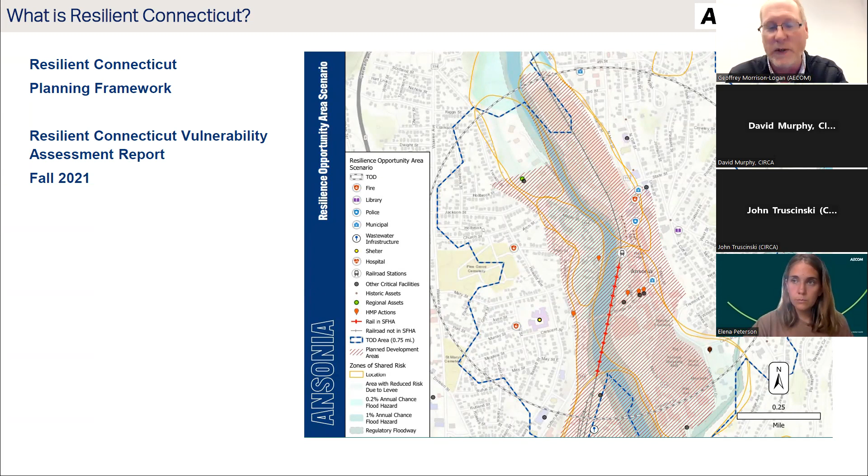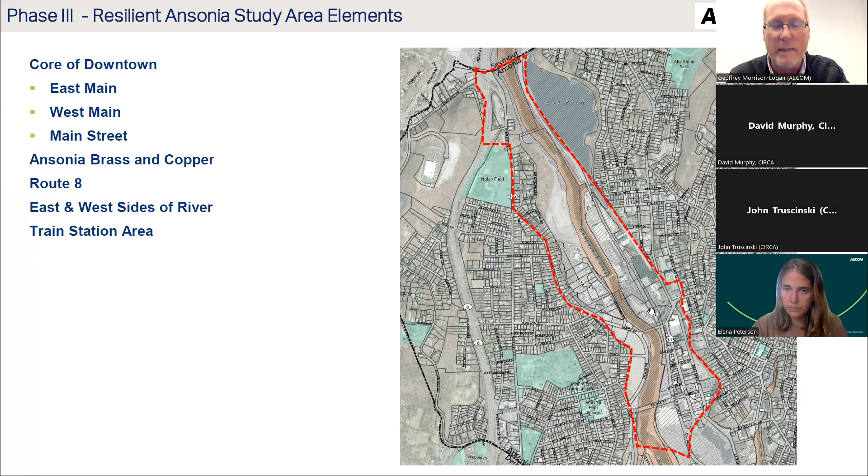And you can see the river that runs through here. Route 8 is up towards the north and runs parallel to the river. And then right in the heart of downtown, as many of you know, there's the train station that provides access to the region and also a critical mobility opportunity in the downtown to get the city connected as well.

So Ellie, you want to talk a little bit about this one? Because in addition to the study area, we started to hone in on why we're focusing on these areas based on the assets that are there today.

Yeah, we felt it would be helpful to have an aerial view of the downtown to see how the river really defines our project area. On the right side, you can see the majority of the downtown. That's where the main train station is, as well as City Hall and the police station. We just mentioned the copper and brass facility that's up sort of at the top of the image. And then on the other side of the river...

It's sort of defined by Olson Drive, and there are some fields along Olson Drive that are flagged for development. And then in the far part of the image, you can see the Route 8 connector, which is the main access to the town. Part of our initiative has been finding ways we might be able to enhance greater connectivity and transit mobility there.

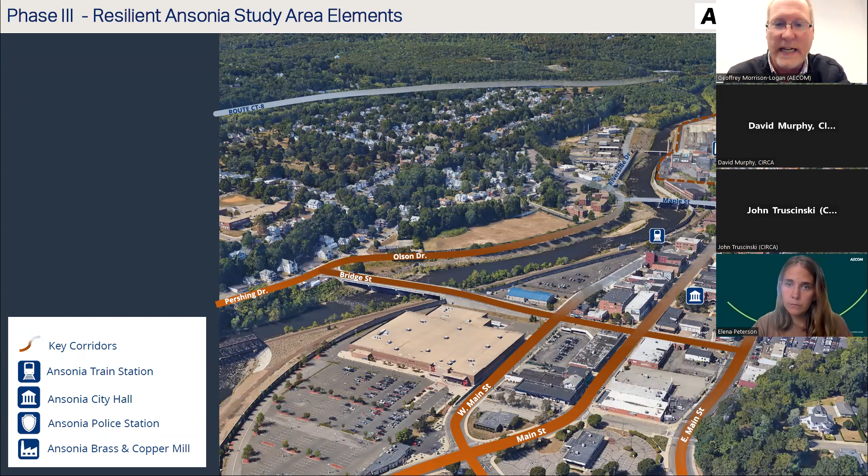Another great aspect of this drawing is it shows the flood wall system that's in there today. As we've gone through this project, we've realized how critical a piece of infrastructure that is, currently protecting the downtown from flooding. You're going to hear us talk a bit tonight about why, in the future, embracing that, further securing it, and making it part of the downtown's future is going to be very important as well. So let's go to the next slide, Ellie.

So a little bit about the character. I mentioned the flood walls, obviously very prominent along the river on both banks, and it shows here clearly that it protects through some of the gates that are out there today, along with some of the existing development, and how important it is about securing the development pieces and preventing the flooding that would happen on these sites if those systems weren't there. And knowing that Main Street is so close by, and what that means for the heart of the community. You grew up around the riverfront. We want to embrace the riverfront and really secure, through these initiatives, many of the same things. Next slide.

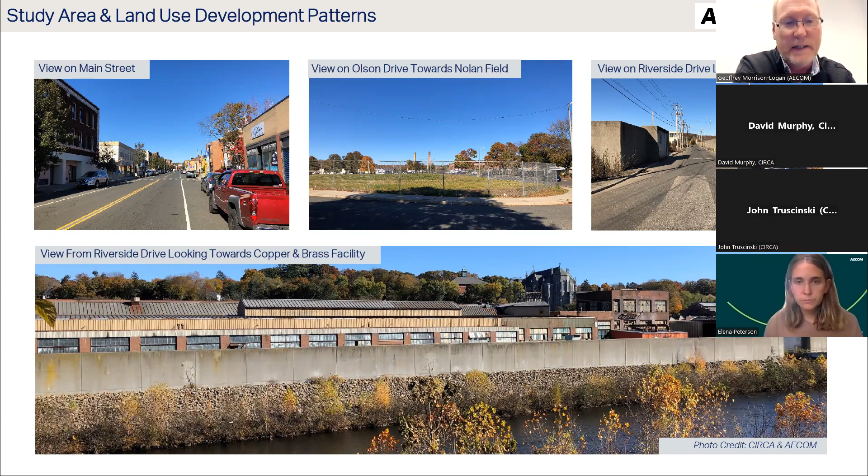And Ellie, do you want to talk a little bit about where we were last time in our last public meeting about why thinking about heat and vulnerabilities would be important to downtown as well?

Yeah, for those of you that weren't part of the last meeting, we spent a decent amount of time talking about heat vulnerability in Ansonia in particular. Although Ansonia is located more inland, it also shares some similar heat risks that a lot of coastal communities in Connecticut are facing.

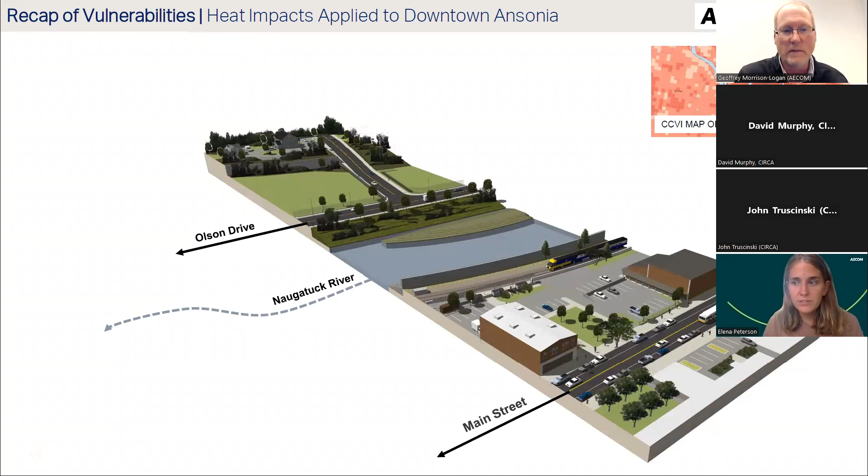For the future with climate change, we thought it would be helpful to take a transect of the downtown in Ansonia. This is located about where the train station is. You can see there's Main Street, the river, which is dividing the transect, and then Olson Drive in the background.

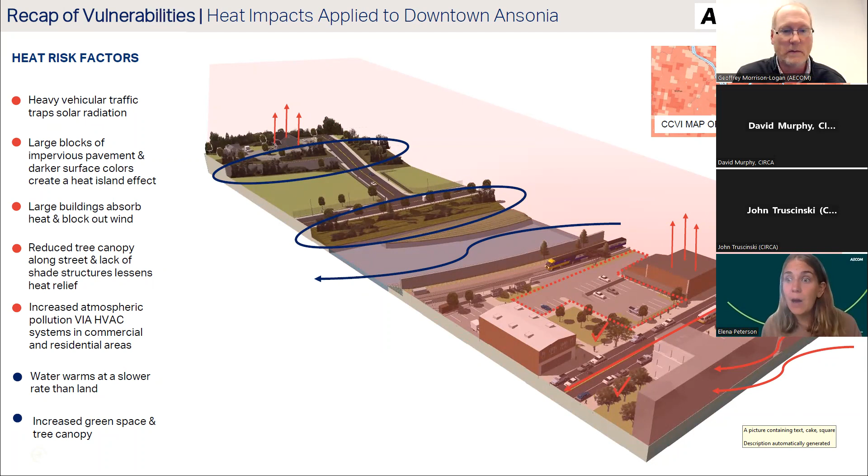And just start to identify some of the factors that makes this area more vulnerable to heat currently and into the future. Some of those factors being large buildings that absorb heat and block out wind, large blocks of impervious pavement. Ansonia has a long history of being a very industrial town, and many areas are still blocked out with impervious surfaces, and there's less tree canopy overall as well to block out heat. So these are some of the factors that we look at to help make areas more resilient in the long term.

Great. Let's talk a little bit about some of the design strategies here as well that we've been reflecting on. Ellie, you want to go to the next slide?

So when we think about what is a resilient community, and David and John, feel free to join in on the conversation here, it's been great for this project as well as others to be, I'd call it a little bit more holistic in terms of what this means for resiliency issues that are kind of cross-cutting as well.

So the idea about focusing on the benefits of community development, understanding within the community if there's ways that you can get to the downtown, to your water body, to the riverfront, and think about evacuation and the kind of resilient corridors as you navigate the downtown to make sure you're securing primary ways in and out.

Thinking about the ecosystems when we think about flood and rain events and stormwater and all those things, by kind of protecting a lot of those existing natural ecosystems, those things perform in a way that help the overall system work in terms of kind of recovering from some of those events.

And then thinking about energy and thinking about economic and social resilience. So as a community, how you are powered, how your economics, how your social infrastructure really starts to work, where you get relief as a community from some of these events.

And we'll talk a lot about tonight, this idea of a resilient center for the community. And then, as Ellie mentioned, really the importance of heat and understanding how heat and flooding go together, and really the ability to think about heat island effect and how you were kind of really mitigating some of those things at a very localized level as well.

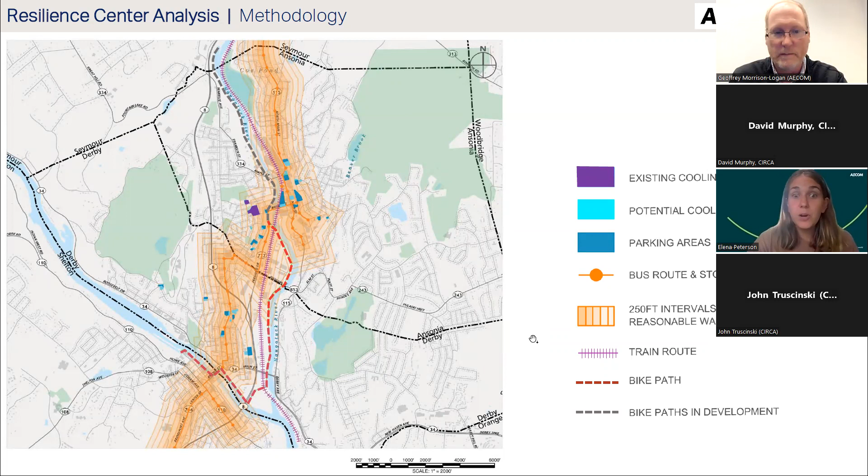And then we looked at large public and some private buildings that the community is already fairly familiar with that maybe could be good applicants for a resilience center in the future, or a pop-up resilience center in the case of an emergency need for one. Based off of this scoring system, there were several buildings that scored most highly, and among those was the Ansonia Armory, which we've now expanded into looking at in more detail, trying to determine what would be needed to convert it into a resilience center.

For those of you that aren't familiar, the Ansonia Armory is located a little bit north of downtown, right next to the Ansonia Brass and Copper Mill facility, just past the police station. It's really nicely located right along the main bus line, as well as close to all the critical facilities downtown.

It's also been utilized by the community for a lot of public events. It's been used as a voting station. During COVID, it was used as a coronavirus testing location. And just last year, it ran the Community Health Improvement Plan workshop, which looked at how the town could encourage more public exercise, especially in the winter months. Due to the familiarity of this place amongst the community, we felt it was a pretty great test subject for thinking about how a resilience center could work.

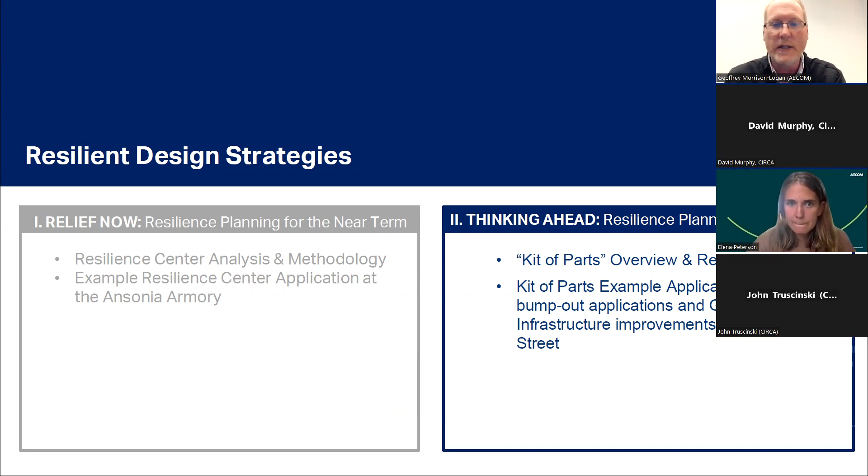Sure, yes. Let's go on to the next slide here. We can dive right into this idea that we've looked, as I mentioned before, at very strategic locations throughout the downtown that we can amplify with some key recommendations.

So of those, we intentionally looked along the riverfront over by Olson, down Main Street as a case study by the train station, East Main Street where City Hall is, next to where the parking lots are, and then off of Riverside Drive, to be able to test in a way some strategies that we can put in.

So we'll go through this relatively quickly here, but we'd like to show you a little bit about some of the key findings in each of those areas.

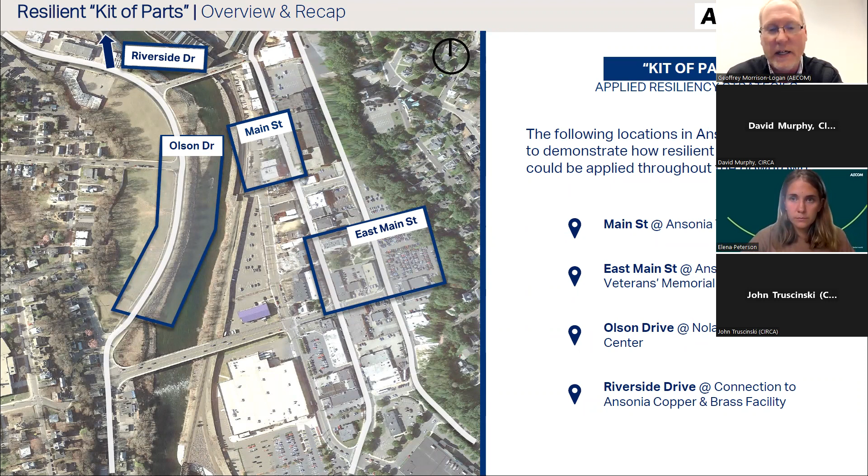If you go on to the next slide, what we'll do is talk about this kind of kit of parts applying to these locations. They're color coded to the left, talking about achieving very different goals - thinking about natural systems or the landscape, how it's performing from a roadway perspective, wayfinding and signage, solar, and those types of things. We're talking about potentially retrofitting some of these locations to make them more resilient, more accessible, and having those features that are frankly missing today.

So maybe, Ellie, let me hand it back to you to talk about some of the specifics of these locations.

Yeah, so here we're looking at being able to encourage a greater green buffer on the roadway. This is showing Main Street, the hub of downtown, and being able to encourage more walkability here would be a huge asset. A planted bump out is one way that we thought about doing that. Bump outs create the opportunity for safer streets, as well as having aesthetic and visual relief.

And then we also thought about the opportunity of creating more solar infrastructure. Ansonia Recharged has been looking at incorporating more green energy into the downtown, so we thought Main Street might be one place where we could seek to achieve that.

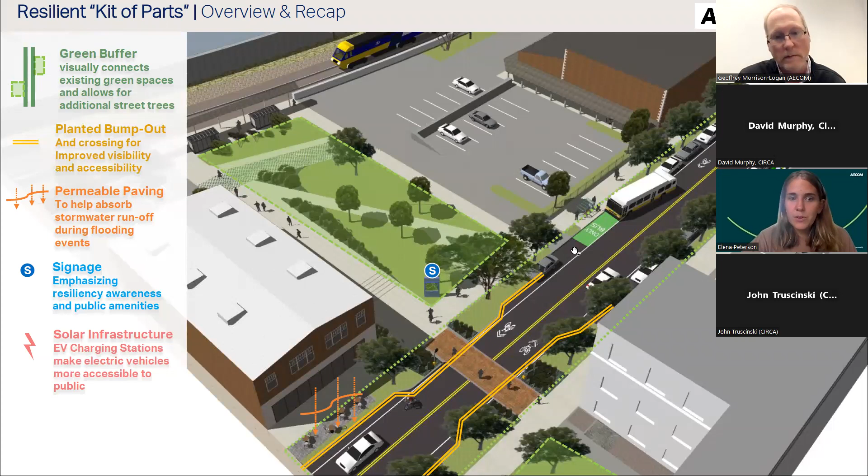Additionally, more signage, thinking about how we can reuse some of our materials through a resiliency lens - using maybe more permeable paving or lighter colored paving that can reflect heat. These are just a few of the examples that we looked at on Main Street in particular.

And maybe I'll jump in on this one, Ellie - we're over by East Main Street here too. Again, a similar kit of parts where we can see City Hall off in the background. The idea is taking the park next door to City Hall and thinking about it as a much improved piece of green infrastructure through landscaping and stormwater strategies, and taking over East Main Street, really necking that down, adding in some trees for shading and cooling effect along the street. And then, as the mayor mentioned, the idea of some energy here in downtown - taking the existing parking lots that are there, putting in photovoltaic cells, thinking about charging stations.

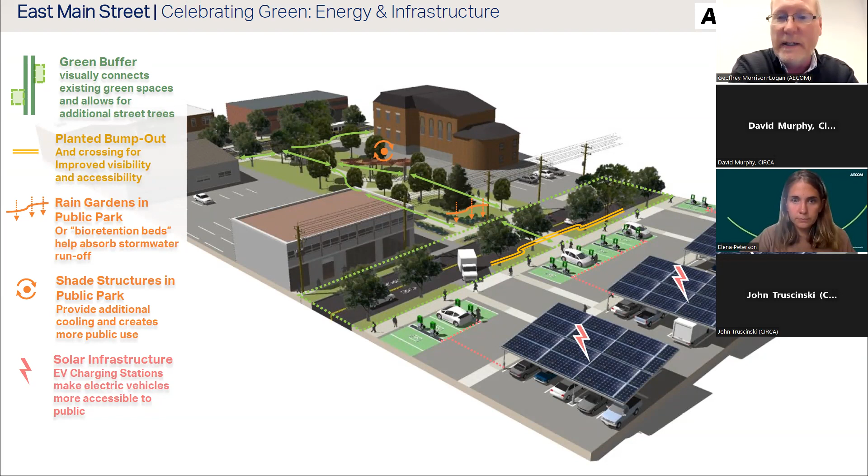Let's go on to the next one, Ellie, this is a little bit more of a recap here. We've jumped over by Olson Drive, by those locations on the west side of the river, where those existing fields are. The idea there is about getting the community connected through a new trail system that would link north-south along the riverfront.

The idea of taking what's an existing really wide road there and necking that down, having some bump outs at the corners, putting in some green infrastructure for stormwater control, thinking about pervious pavement for parking on that street versus just regular pavement. And then the idea of understanding what's happening on the river - some great overlooks, some resting areas to get shade and overlooks and cooling by the riverfront. This is a very special part of your downtown that really could be amplified to make it an amenity as well as perform from a resiliency perspective.

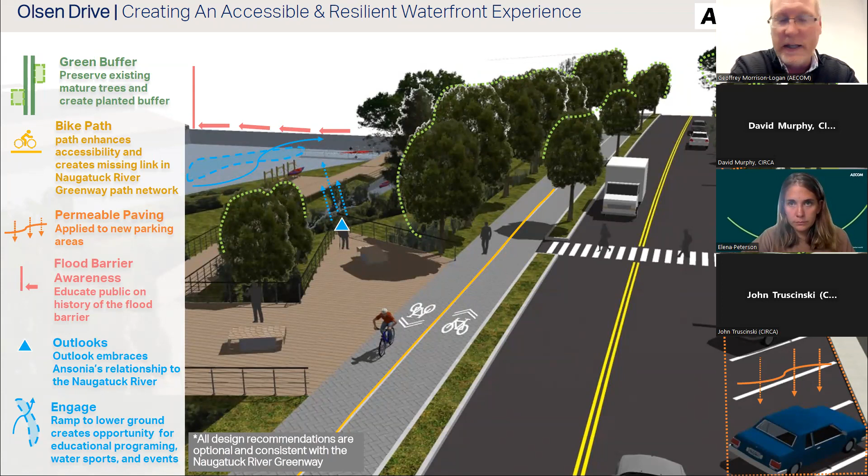And let's go on to the next location, again showing these kind of applied kit of parts. Now we move north up along Riverside Drive. And again, the idea is next to the existing flood protection system that's there today - there's really no reason why that cannot be further embraced and enhanced for the long term, thinking about biking accessibility and stormwater improvements along that to help with localized flooding versus flooding from the river.

And then the idea of some signage and wayfinding, and the importance of thinking about these as a system that not only performs from the water, but also unlocks the ability to have some development, especially around the copper mill site across the river. If these new investments could lead towards better bridges, better connections, better flood wall systems and protection, that can start to unlock some of the economic development that's really a great potential for the downtown as well.

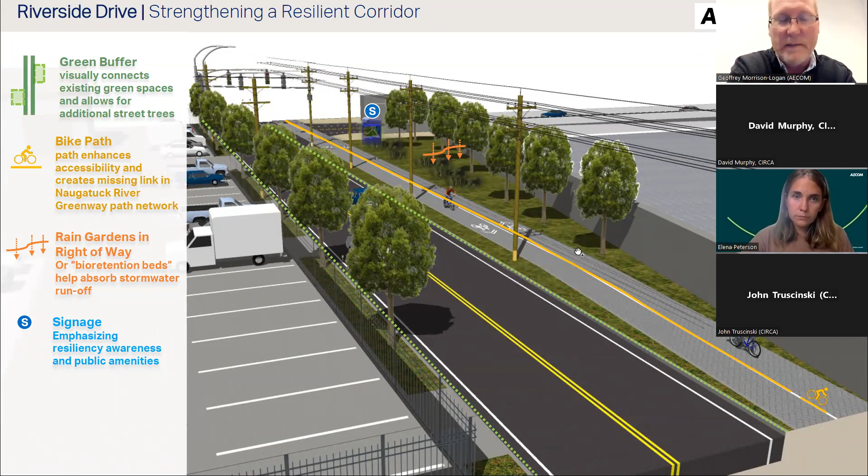Let's go on to the next slide. As a recap, where we ended last time on this broader kit of parts, we really believe that if you look at the entire downtown and all those locations we looked at, you can start to think about how these resiliency kit of parts or strategies can be deployed through these different locations.

So that over time your downtown is very robust. It has a lot of green links to get connected with this green infrastructure that'll let it perform. It has better ways of getting bikes and pedestrians around, and it's thinking about how you engage the river, how you have overlooks, and how that river can really be performing versus just being behind walls. Also, as the red line shows, knowing how important that piece of infrastructure is from the flood wall protection system, further certifying it and looking at maintenance issues, we know that's a really critical part of the future as well.

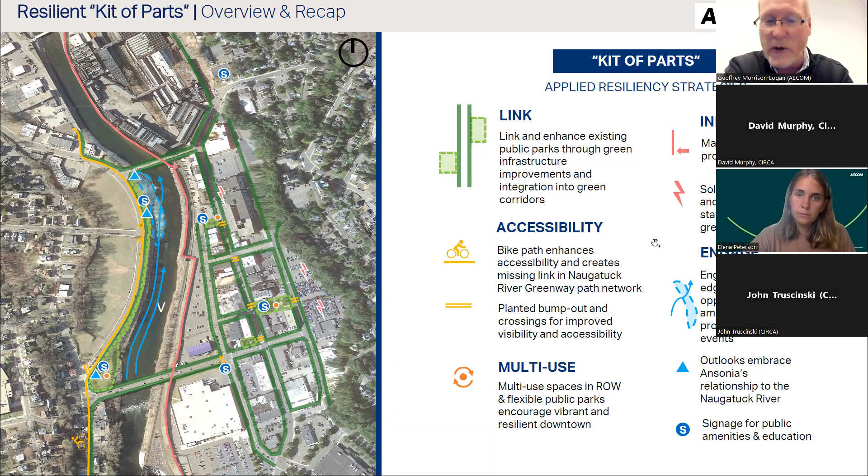So with that, if we go to the next slide, we'll start to dive in a bit further in terms of some of the accessibility parts of it. Do you want to mention this one here, Ellie?

Yeah sure. So we thought it would be useful to take one small kernel of an idea that we proposed in the first section, such as the planted bump out, and break that down into how all the different ways that such a simple intervention could have a different impact in terms of resiliency.

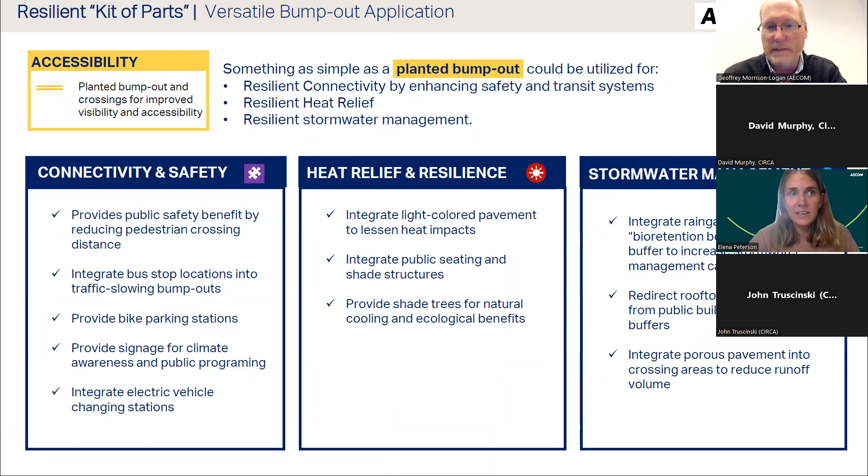So we took just a sample transect of Main Street. Here you can see there's a pretty wide corridor with parking on either side. There's currently bus stops along that roadway, and then also sidewalk space.

And we looked at it in terms of putting in a planted bump out to serve the purposes of enhancing connectivity. So although a bump out can provide some aesthetic value and visual relief, it also helps serve the purpose of safer streets by closing the distance of crossings. And so it can create a more walkable environment and a more transit-friendly environment as well.

You could incorporate bike parking into the space allotted for the bump outs. You could also use part of the bump out for a nicer bus stop landing that's easier to navigate to. You could use some of the bump out space for generating more signage about climate awareness or other public programming, or integrate electric vehicle charging stations into some of these areas. There's lots of different ways it could be utilized to really improve the pedestrian experience of people downtown.

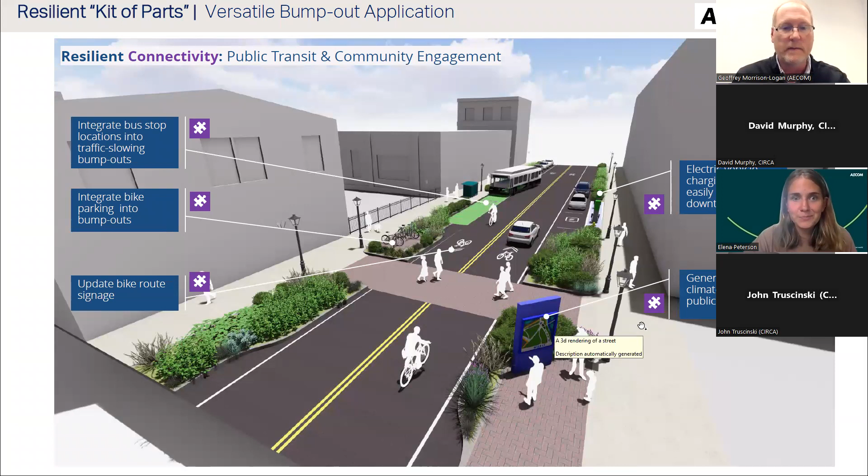Likewise, you could look at a planted bump out as far as how it could serve for heat relief. You could use some of the space for integrating more public seating and shade structures. You could promote more shade canopy of trees along the corridor, or even integrate lighter colored pavement, which, as we talked about earlier, can help reflect heat and create a cooler land surface.

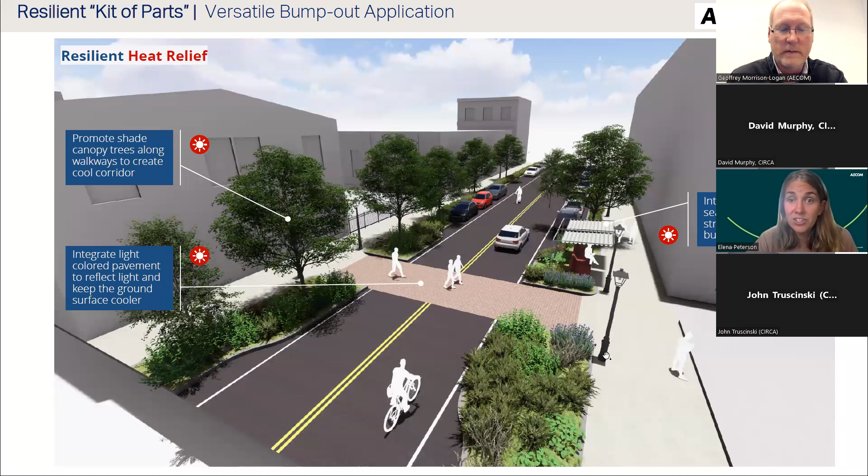Next, you could look at it purely in terms of stormwater management. You can integrate rainwater gardens or bioretention beds into the bump out space along the corridor. You could also incorporate porous pavement into new materials you introduce, which allows water to be redirected into the beds on either side of the street. You could even look at integrating a rooftop water catchment system, which could take that water and utilize it in the planted regions.

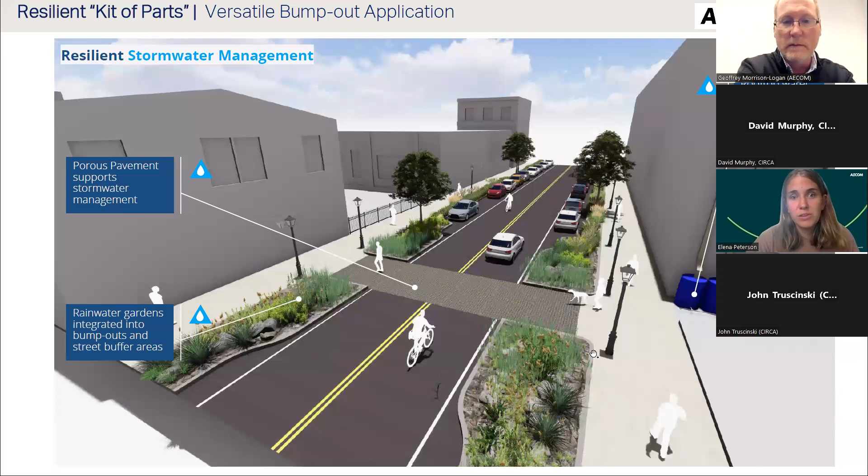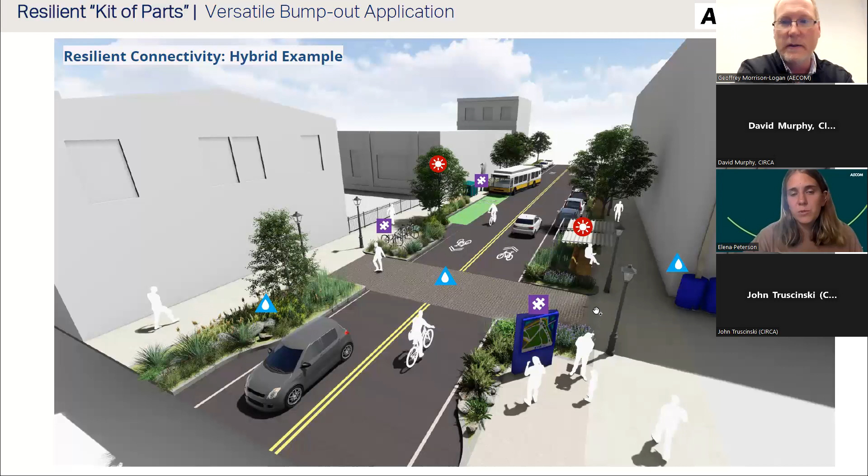And then lastly, we thought it would be exciting to think about a hybrid example where this simple intervention can operate on many different planes of resiliency thinking. Here we have the bike parking idea incorporated into part of the bump out, shade structures on the opposite side of the street, porous pavement used in the crossings, and shade canopy dispersed throughout. So it helps generate some ideas of how one simple intervention can actually have a large impact.

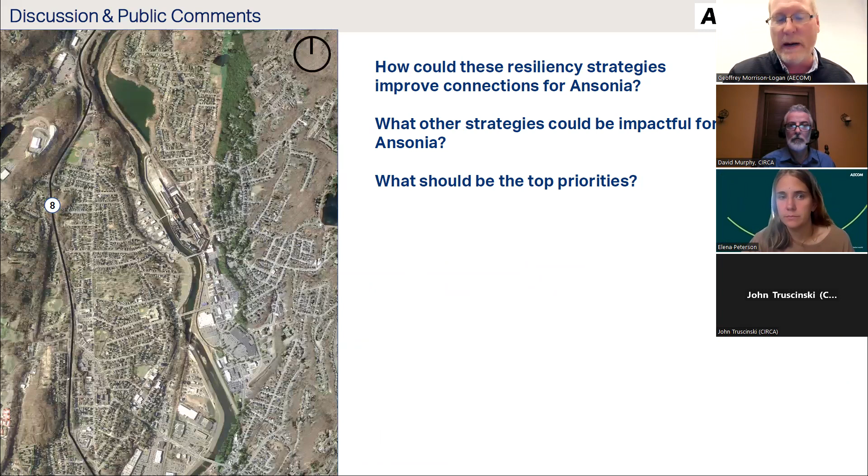Maybe we go to the next couple of slides as a reminder. We spent our last public meeting talking about all the kit of parts, zooming into those areas, with a bit of a refresher tonight. But with some comments, especially after tonight's meeting, we'd love to hear more about that resiliency center idea and how more investment into that project could bear fruit for the entire community in terms of cooling, access, major events, and having a secure place for downtown.

And as Elena just walked us through, we'd love to get a few more ideas around Main Street and how deploying any of those options through bump outs and enhancements that what's already a great Main Street can become even better by having these resiliency, Green Street, mobile, accessible aspects that can help it perform in terms of your resiliency goals as well. So that's what we'd like to spend a little time on.

I know maybe what I'd like to do is open it up to David and John, because I know you're working with many communities throughout Connecticut, to get a quick soundbite about why these projects might make sense, and if the city can rally around identifying some of their top priorities, why this is helpful to start moving these from big ideas into things that might become fundable over time. So help us a little with the context, David.

Sure, I can say a couple words. And Nancy, it looks like you're the person here who I don't know, so if you're involved with city government and want to shout that out, let me know before I say too much. But in general, we were interested in looking for ways to plug into all the good work already happening in Ansonia. There's so much happening downtown, and the city's been so successful gaining grants, with the redevelopment and units coming online and the future of Ansonia Brass and Copper, we thought it would be remiss not to try to offer some ideas to become more resilient.

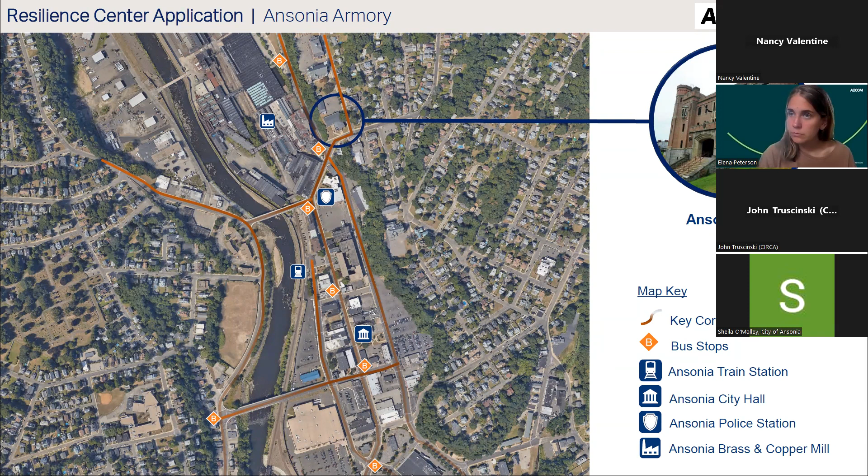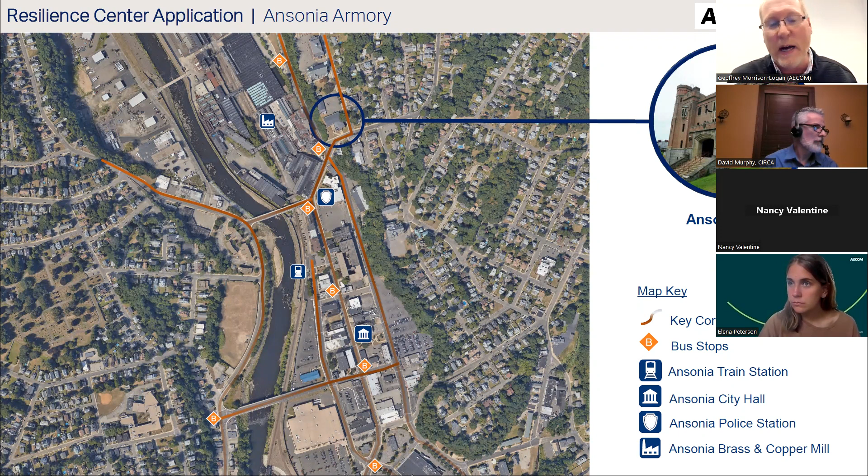We've been working on this for about 9 to 12 months, thinking about why we'd have certain improvements, what the benefits would be, and how to be holistic about the entire downtown as a living, breathing system of interrelated things. Given that the flood wall protection system is there today, and understanding how critical that is, how can we plan with and around that to identify real projects that could move forward, going beyond studying and master planning into projects the city can move forward with — whether on the city's own dollars, grants they can go after, or even partnering with the state to implement these things over time.

Of all the different things we looked at, there's a lot of opportunity within Ansonia to make real inroads from a resiliency perspective. The top two that rose to the top were the idea of making the Ansonia Armory a hub, as John talked about, and investing more in it to make it a benefit for the entire community.

Also the idea of taking some of your major roads downtown — already great streets — and making them even better through these interventions, setting you up for success. More to come on that, Nancy, but the idea is to use these planning studies to position Sheila at the city, and others, and the mayor, towards implementing more things.

As David mentioned, there are a lot of amazing projects in the pipeline or already working downtown, so this is very much trying to be complementary to a lot of those other things currently under way. Hopefully that helps answer the question.

Anything else? Thank you. Yeah, thank you.

AECOM is really just a consulting firm that does planning, engineering, landscape architecture — all that type of work, helping communities deal with these types of questions.

Thank you. And Nancy, I can also say we're working with AECOM on a couple other resiliency projects that CIRCA is funding, so they're a partner with us on a few other communities as well.

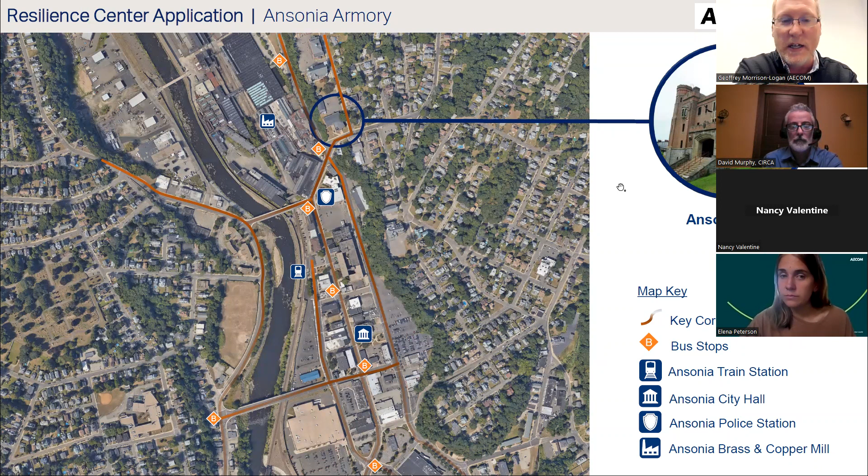So let me just go back. I don't think we have anyone else that's joined, so maybe we can focus on wrapping up and some next steps. Elena, can you talk about where we're going next in terms of our process? We're really towards the end of where we've been working through a lot of these strategies with Sheila and with different local stakeholders and departments.

We're really looking to wrap this up within the next 3 or 4 weeks. We'll post this via Sheila to the city's website, looking to get a lot of feedback about where we can continue to prioritize these recommendations and make them stronger as we prepare the final report.

What we're looking to do is let this become a very action-oriented and implementation-focused report that can be used to go after future funds and grants. That's what we're working on over the next few weeks. Frankly, we've been really excited to find so much potential in Ansonia. When you start working on a project like this, it's not always obvious if you can make inroads and changes that can be effective. We were delighted that throughout the entire downtown, from economic development, beautification, heat, cooling, sustainability, and stormwater perspectives, there's a lot of great things ahead for Ansonia. If you think about investing in smart things and future generations, there's a lot of great potential we're excited about.

So before we close out, Elena, anything else you wanted to mention for tonight in terms of next steps or major takeaways for us over the last few weeks and months?

One thing we'll also be working on in the next few weeks is developing cost estimates for some of these interventions, which is something we haven't really touched on yet. Given this is a pretty high level study where we're trying to look at the town holistically, our approach will be to look at each intervention independently and see how we might analyze the costs and how that could be scalable for each one. That's another asset we're looking to incorporate into the final report to hopefully help better fund projects in Ansonia in the future.